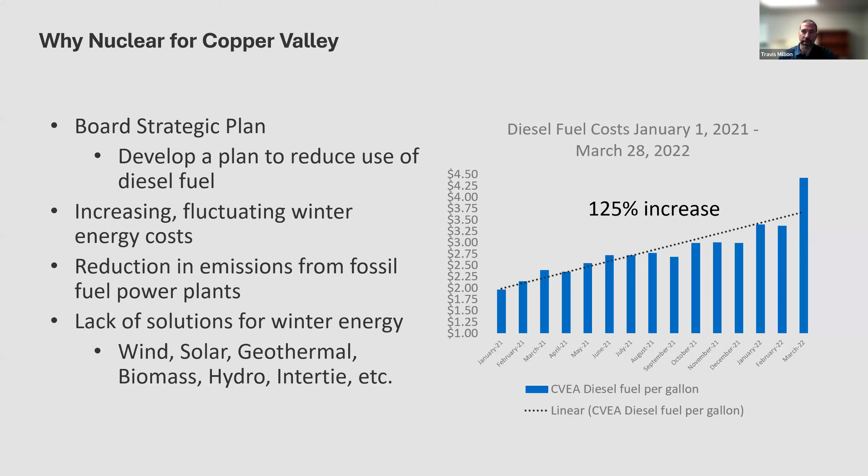This was just another option that CVEA was exploring. Back in early 2020, our board unanimously decided to start pursuing the MMR technology more and find out what we could discover for solutions in our service territory. So at that point is when we started talking to the various manufacturers.

One of the misconceptions we saw throughout this entire process was that people were really confused on really what MMR technology was and wasn't. A lot of people thought anytime you mentioned nuclear, they were thinking of the standard light water reactors used in the current fleet in the United States, which are very large scale facilities. So what I'm showing here is a graphical representation of the landmass needed for a light water reactor versus the landmass needed for an MMR.

Again, we were working with USNC. Their particular project we were looking at was about a 10 megawatt electric unit that took up about 5 acres of land - quite a bit smaller, about the size of 2 football fields. And that's just being represented here in this graphic.

The other part we recognized was that people were really confused within our communities about how big the reactor building would be. The graphic showing the red cylindrical spot in the middle of the light water system is the reactor building. And we had to zoom in on the yellow spot in the middle, which is about the size of a Connex mounted vertically into the ground, to show how big the reactor building is on the MMR. So quite a bit smaller than a traditional reactor.

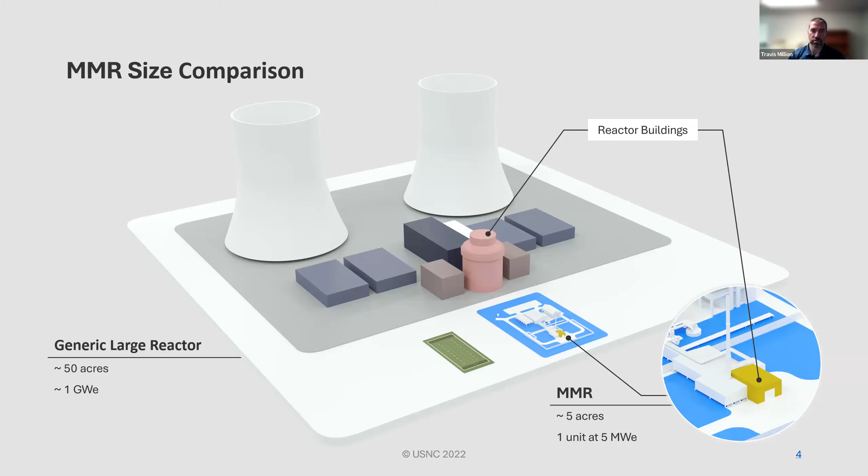This slide's just talking a little bit about the technology, but what I want to point out is this graph in the middle on the right-hand side. It would have 2 reactor buildings giving us 10 megawatts of electric energy and a total of 30 megawatts of thermal.

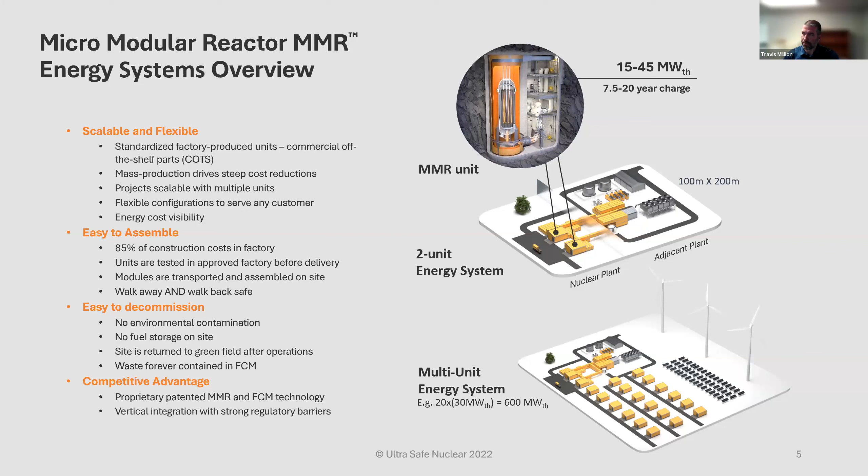So the purpose of our feasibility study, and what we wanted to discover, was whether there was anything that would prevent us from siting a micromodular reactor within the CVEA service territory. We wanted to identify preferred sites and locations and what those characteristics would be, and start looking at what the cost parameters would be in order to make a good decision point going forward. For a cost comparison, we figured going in that there was no way that, especially the first of a kind coming out, would be able to beat our hydro prices, but we were pretty certain we could beat our diesel fuel prices. Obviously we're also looking at the benefits and the concerns and issues of the communities in our area.

And to take it a step further, as we contracted with UltraSafe to do the feasibility study, we wanted to have a third-party independent consultant take a look at this information as well. So we contracted with an Alaska-based company, Electric Power Systems, to spot check the information. They're a company well known throughout the state of Alaska, they do a lot of work in the electric utility industry and have done a lot of work with us. So we just wanted some third-party credibility in addition to the work CVEA and USNC were doing on this project.

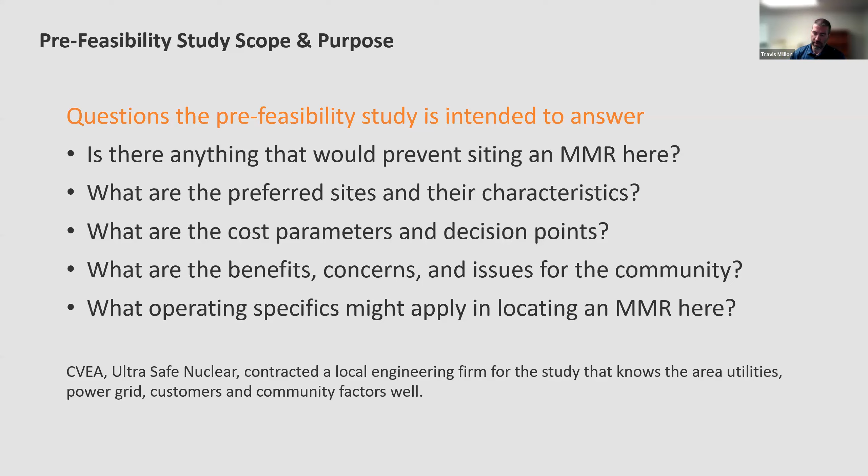So what I'm showing here is just a timeline of the feasibility study we went through. We made an announcement in February of 2022 that we were going to move forward with a feasibility study looking at the MMR technology for the CVEA system.

Prior to that, we actually went and met with our congressional delegation in Washington, D.C. in November of 2021, just to give them a heads up so that if any constituents reached out to them, they weren't blindsided. At the same time, we reached out to the governor's office, and in January we met with our state delegation and discussed this with them as well. Again, we didn't want to blindside any of our legislative folks.

From basically March until the first part of October, the study was being developed. We received the draft copy of the report in October, and our board discussed the results during our October board meeting. We needed a little more additional information to finalize it, including some internal economic analysis, which was completed in December of 2022. We met again with the board in January of 2023 to determine next steps.

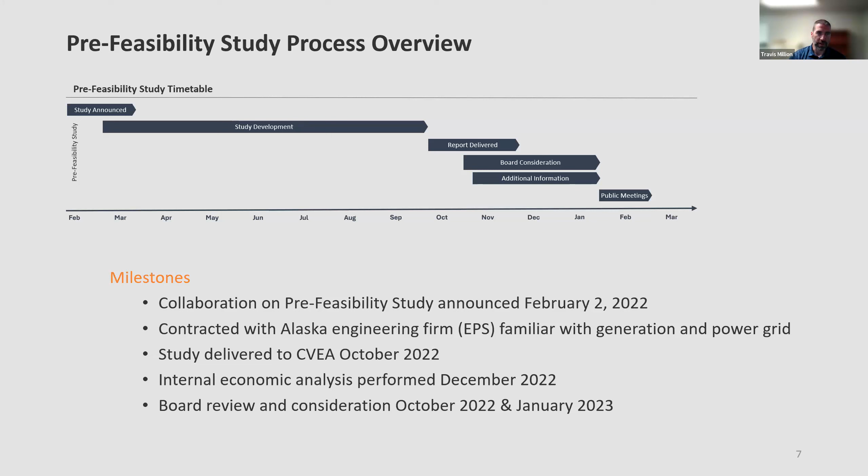A different approach we decided to take with this was to get out in front of it early. Normally, if we were looking at a generation project, we would do the feasibility study, maybe start doing field studies, and once we had results, we'd go public and start talking to our membership about the potential of the project.

But because anytime you mention the word nuclear there's mixed emotions with it, we wanted to get out early and often with our membership. So as soon as we made the public announcement, we started holding public meetings in our service territory. Even though we knew there would be a lot of questions we didn't have answers to, we thought this was a prime opportunity to find out what issues or concerns our members had and figure out ways to address or educate on those things.

During that time, we went around and had public meetings both in Glennallen and Valdez. We met with the Valdez City Council. We had multiple trips back to Washington, D.C. and to Juneau, and just had a lot of stakeholder engagement throughout the entire feasibility study process.

There were a few things that came up, and the thing we continuously heard over and over again, besides the fact that there was some misconception on what the MMR technology was and was not, was safety issues, environmental impact, and waste disposal.

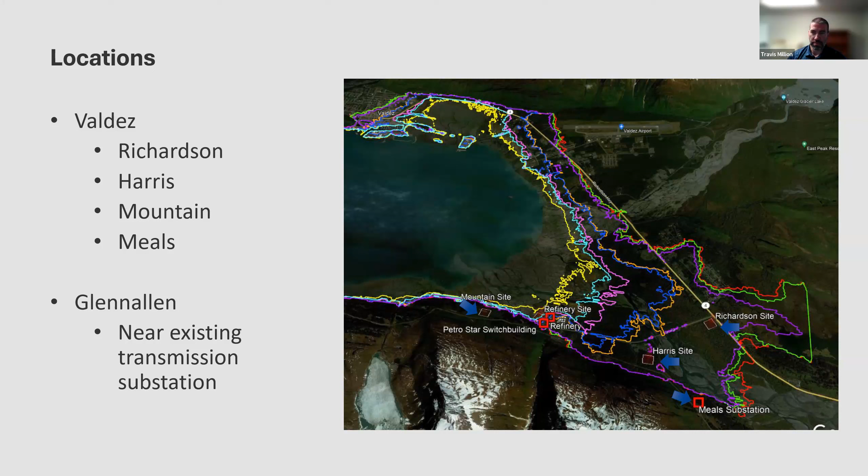As we were looking at this for Copper Valley Electric's situation, essentially what we were evaluating was we knew we would still have our hydro we wouldn't be able to displace. We'd be able to displace some of our diesel, but primarily we wanted to look at what it would take to displace our cogeneration project that's currently our wintertime workhorse.

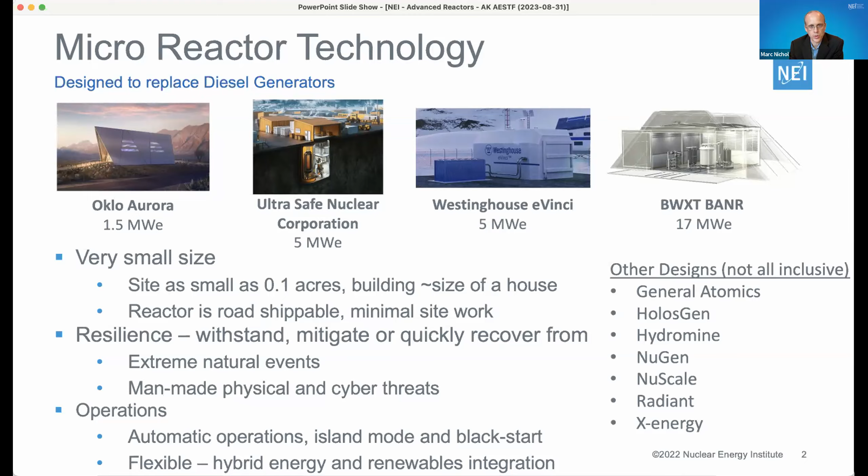The system benefits of advanced reactors are largely the benefits of nuclear energy generally: long-term price stability, because we're a high capital cost, but a very low fuel and operating cost technology.

Readily dispatchable. I talked about the resilience and reliability, so it's 24 hours a day, 7 days a week, 365 days a year. One of the differences with microreactors is that current nuclear energy has to refuel every 18 months or 2 years. Microreactors are being developed so they can go between refuelings 5, 10, 20 years, possibly even longer. So they're much easier to locate at a site without needing to transport much to that site for future maintenance. It's all really self-contained for a very long time.

Talked about integration with renewables. The use of transmission is much more efficient for nuclear energy generally, just because of our energy density. So not only is it the land utilization, but more importantly, the efficient use of transmission as well.

I think by now most everybody knows nuclear energy is zero carbon emissions, but we're also one of the lowest total carbon footprints of any source. I think we're tied for the lowest with wind. And we're also being designed, especially the microreactors, for what's called dry air cooling, so they don't need a local body of water as an ultimate heat sink. And I talked about the black start capabilities.

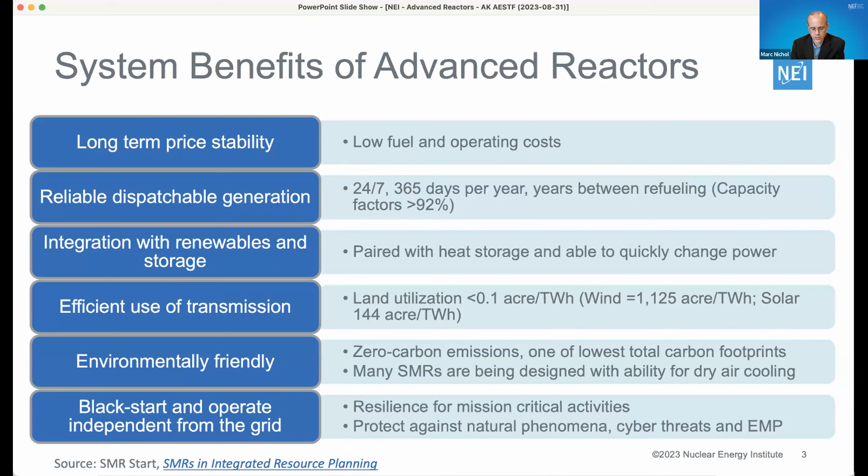What we're hearing is that even those processes that might be a little bit higher than what the output of the microreactor would be, it's very simple and cost effective to be able to boost that with electrical heaters to get to even higher temperatures. So really all of these potential heat uses are all within range of what a nuclear microreactor would be able to produce.

Looking long range at very remote areas, you can start to imagine future scenarios where not only is the microreactor providing that electricity, it can produce district heating. So it can provide heating that's piped throughout the local village to provide heat directly, to decarbonize heat generation for homes and other things.

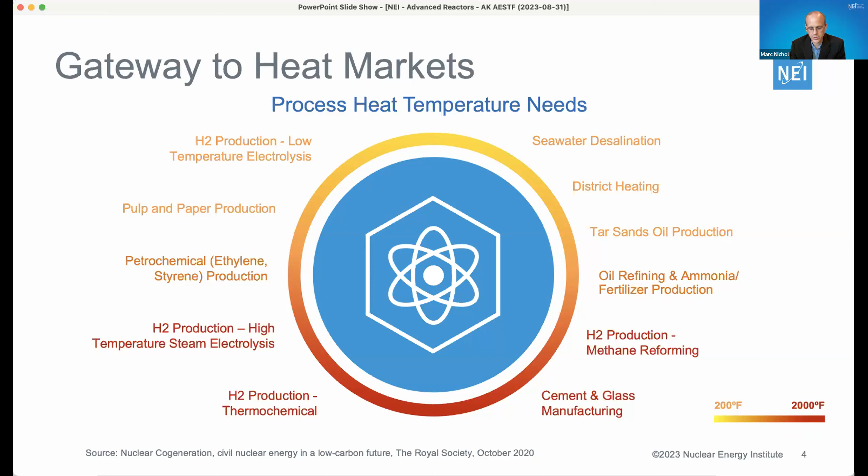It could also be used to produce whether it's hydrogen for hydrogen vehicles or electric vehicles, or ammonia for different things. I know the Department of Defense has talked recently about the promise of technology that would be able to produce jet fuel just by using energy in the air. So there's a lot of opportunities that a microreactor could really be self-contained to decarbonize all energy needs in a particular location.

That brings us to the market opportunities or applications for this, and I'll divide it into stationary and mobile. Looking at the stationary, these would be microreactors that are in place for their entire lifetime, 20 years, 40 years, or longer. And those are remote villages and other things. Now in terms of that lifetime, I talked about the fuel life, which could be 5, 10, 20 years, or even longer.

But the business approaches that people are starting to think about for microreactors is that they would almost be like batteries, where you would bring one in, it would operate for its fuel lifetime. So the fuel might be, let's say, 10 years. And then you would come in and swap it out for a different microreactor that has new fuel in it. And then after that microreactor that you had there first cools off, you could remove it from site, including its used fuel, take it back to a factory and refurbish and refuel it there.

So the used fuel wouldn't stay at the operating location. It would be taken away after a cooling period. And then that reactor vessel can operate for longer. That's why you would refuel it. But that site itself, because it's continuing to get refreshed with a battery every, say, 10 years, it would be licensed for 40 years initially. But what we're finding with today's reactors is that they've been relicensed for 60 years. The NRC is going through a process to relicense them even longer, up to 80 years. And so these are really, really long duration assets.

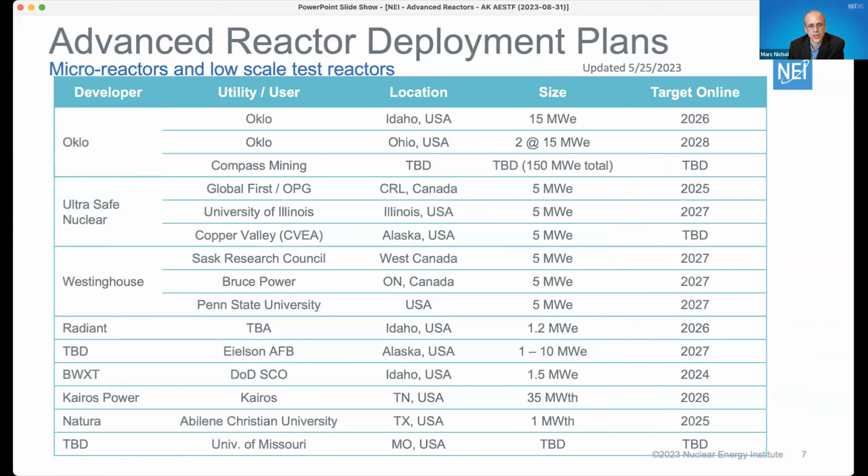This is a list of all those projects. I went through some of them. We can come back to questions on this if you want to know more, but otherwise I won't go through the details now.

When we look at advanced reactor licensing progress, this is an indicator of maturity and commercialization, because everybody has to go through the regulatory process. There are a number of microreactors going through that process. Abilene Christian University is under review now. Some of the others I mentioned are in what we call pre-application, meaning they're interacting with the Nuclear Regulatory Commission and preparing to submit an application to the NRC.

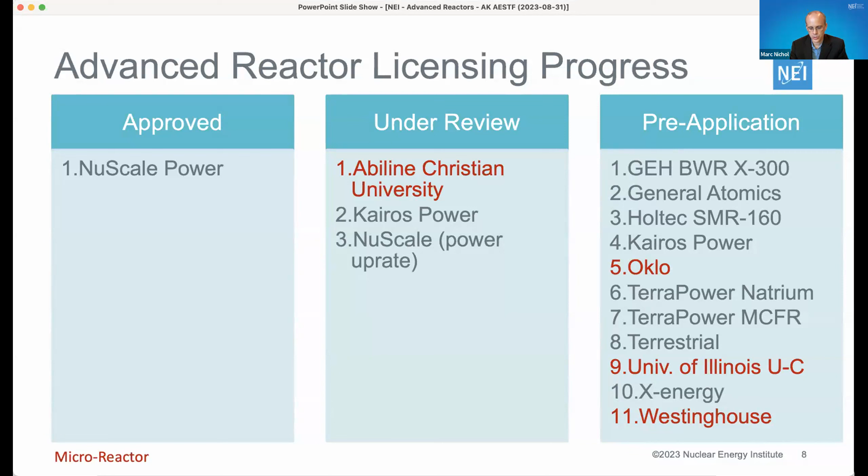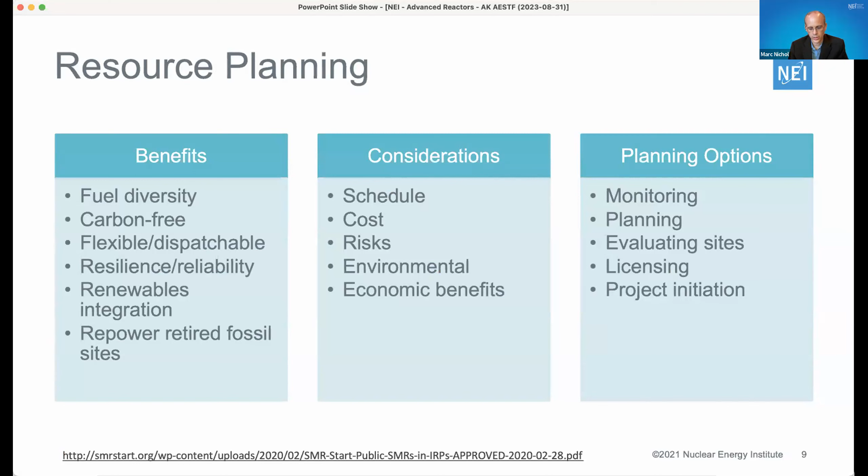In terms of thinking about microreactors, there's a lot of information about how you do resource planning. The one I want to focus on here is cost. I'm going to talk a bit more in depth on cost, but I just wanted to show that there are many considerations you need to go through, and the one I'm about to discuss is just one of them.

When we look at cost, NEI did a paper back in 2019, which I recognize is a few years old now. After I go through the results from that earlier paper, I'll talk about what the current situation in 2023 implies for that.

We did a cost analysis on microreactors and tried to compare them against diesel generators in a number of markets. First, in terms of estimating diesel generator costs, we looked only at the fuel cost. We decided not to take in the depreciation of the capital cost, figuring that's already been paid for and built in. So swapping it out for a microreactor isn't really the thought process, because we're really looking at replacing installed diesel generators, not a question of whether new generation should be diesel or micro. So we did not include capital.

We also did not include O&M. We recognized those costs would increase it, but we wanted to be as conservative as possible in this cost analysis. The fuel prices we used ranged from $2.86 a gallon to $4.89.

For the microreactor cost, we sourced the cost inputs from the microreactor developers. We have a range of cost inputs in that report that's referenced here, everything from the overnight capital cost to the fixed and operations and maintenance cost, fuel cost, and decommissioning, as well as the refueling, which is basically the swapping out of the fuel that I talked about earlier.

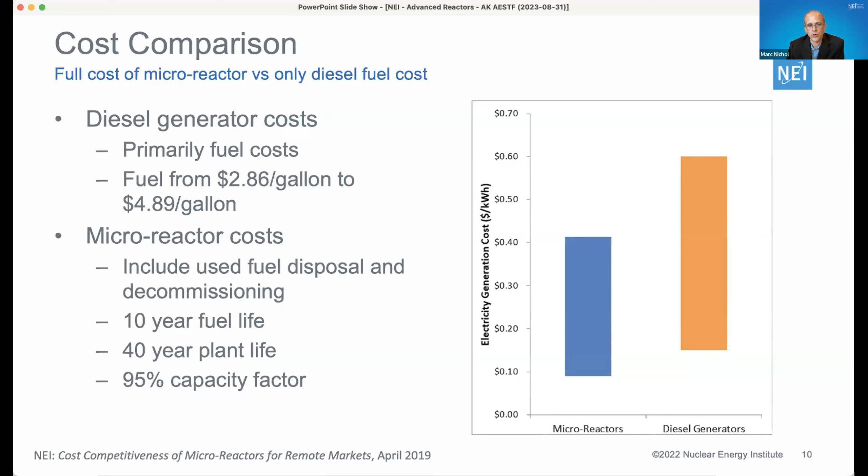You can see here the overall conclusions. I'm going to go into some detail on what's under the hood here, but the overall conclusion is that in most cases a microreactor could be lower cost than the installed diesel generator. So while every decision is project specific, it does show that a microreactor is at least something people should be considering.

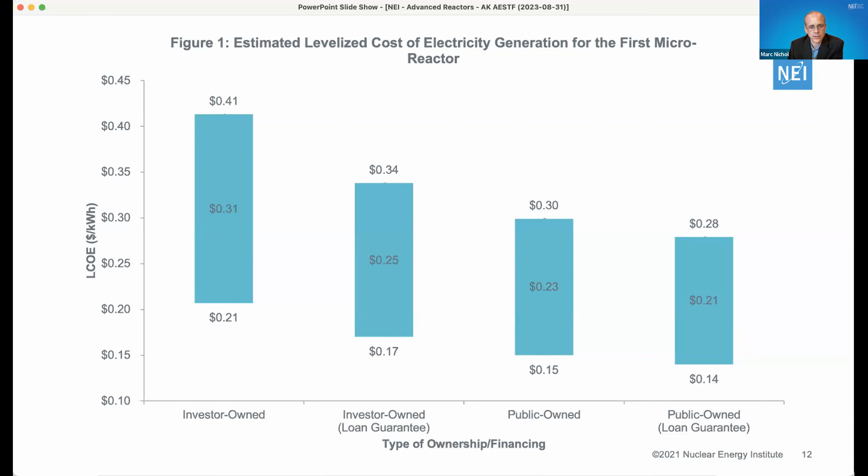We also looked at the sensitivity on how much of a capacity factor the microreactor achieves. They're able to achieve a 95% or above capacity factor because they are that reliable, resilient generation. But if you were going to integrate them with renewables and flex them up and down in power, and you would just be producing electricity, not switching that electricity to heat or hydrogen, then you're not operating at full power all the time. So you get lower capacity factors, which, if you're a high capital cost asset, is a problem, because you want to operate it as much as possible, since your operating and fuel costs are very low.

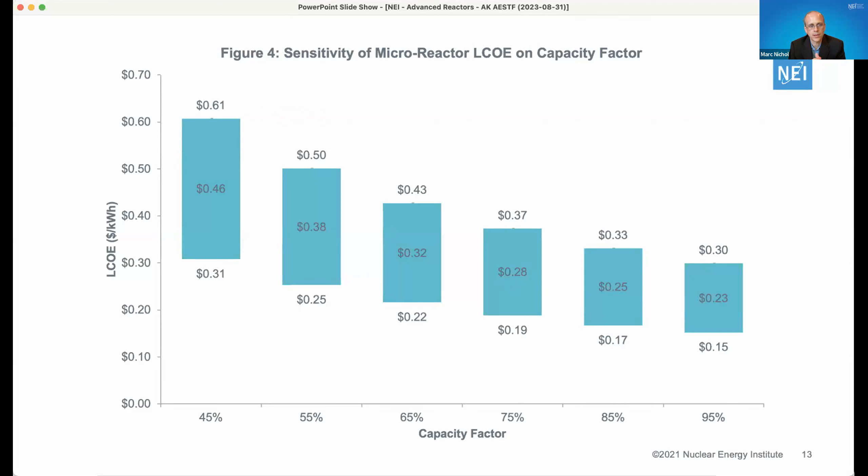Finally, looking at the financing of microreactors—one of the earlier questions was, well, what's the total capital cost? So we took a 5 megawatt plant as an example, and using the numbers in the report, you get to between $50 and $100 million for the capital cost. That's the upfront capital cost.

Recognizing that could be really significantly high for some smaller communities that may want this microreactor, and a bit difficult to come up with all that capital up front, although not impossible, there are financing options available. We looked at what are the different options for business models. The conventional business model would be that the local utility finances all that capital cost, typically by debt. As I mentioned, you have lower rates, you can amortize it—there's certain advantages to that.

But there are new business models that the industry, and especially the microreactor developers, are working on. That would be where the developer would own and operate the plant, or they might find a third party that does it, but usually it's a developer. Then they would sell the power to the local utility through a power purchase agreement. The local utility then would not be financing the capital costs—they just pay for the power. So under this model, it doesn't matter if the capital cost is 50 to 100 million, because the utility is only paying on an annual basis, or per-service basis, for the power.

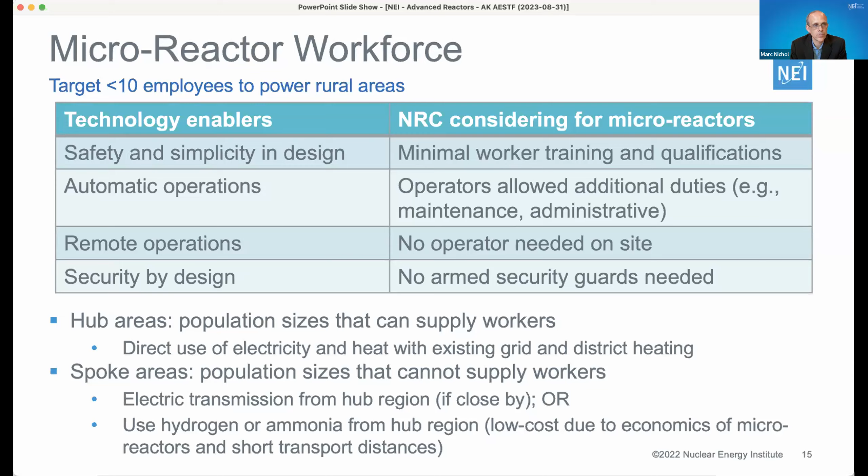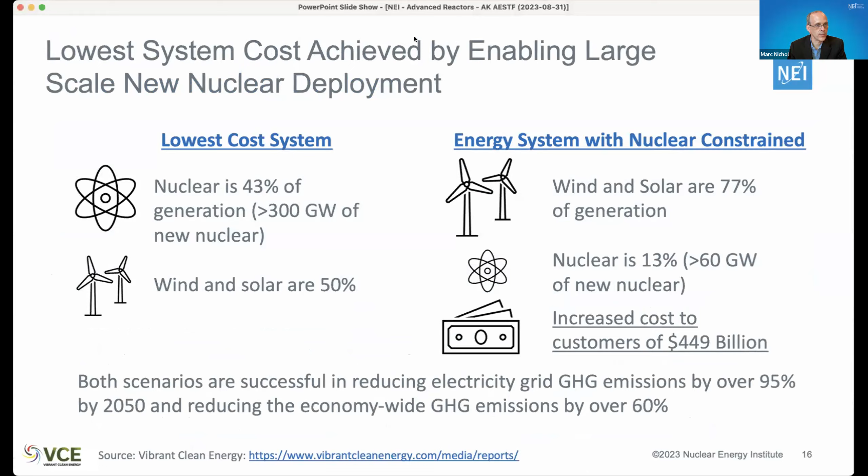Yeah, let me go back to figure 4. Would it be in the report, or was it in my presentation? Oh, I see, okay, it was the first figure, this one. Yes, it includes cost of capital. Excellent, thank you.

So unless there are other questions from our task force members, I'll give our Q&A a chance to catch up if there are any remaining questions, but I do have one question for you, Mark.

What market factors do you anticipate will influence the cost of microreactors into the future? I understand there are some concerns about the supply chain for fuel, the availability going forward for helium in gas-cooled reactors. Do you have any sense of how that will impact cost competitiveness going forward? Yeah, that's a great question, and actually you touched on the thing that I forgot to mention.

I promised that these were 2019 numbers, and I promised to say, well, what does it mean in 2023? So a couple of things. One is that when we put these numbers together, the microreactor cost, in many ways, we tried to be conservative. So I think if we reran these numbers today, those costs would actually trend closer to the lower range than the higher range. I think that was a good thing.

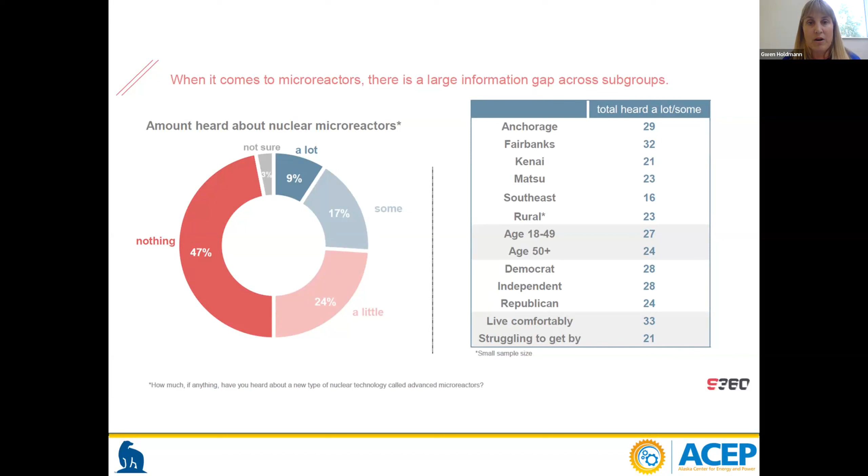When it comes to whether folks have actually heard about microreactors or advanced reactors, about three-quarters of people had heard nothing or very little about them. That was a little bit surprising. Only 25% had heard some or a lot about microreactors, and that was fairly consistent across the state. Fairbanks was a few points higher, but not very much. So that just shows that there's still a big part of the Alaskan public that isn't tracking or isn't aware of this technology, especially how it differentiates from more legacy or conventional nuclear energy.

One of the findings was that without additional information, when we simply asked, are you supportive of nuclear energy as an option for Alaska, the support was pretty low, especially compared to other energy technologies. It was about 48% total, with 27% strongly supporting it. Then we went ahead and gave them a paragraph, I'll pull this up here, that we tried to make pretty neutral, but gave a little bit of additional information on what a nuclear microreactor is, how we're defining it, how large it is, in a context people can understand.

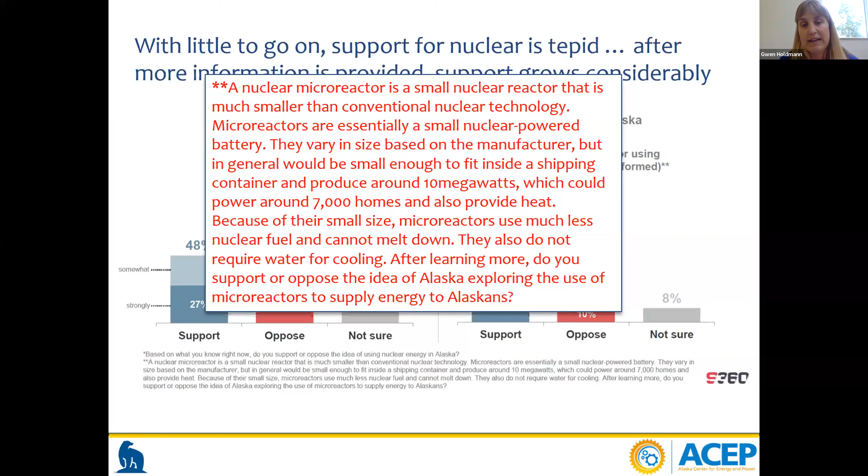And then a few other factors, like the fact that they don't require water for cooling and things like that. And then we asked them again what their perception was, and the change to support was quite high, it was 26%. So what that would indicate is that there's still a lot of people that just don't know enough about the technology to really have a truly informed position on it.

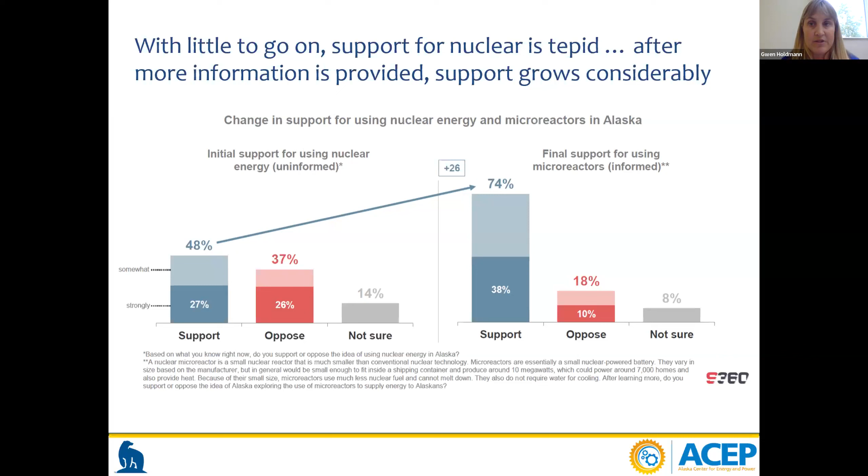You can also see, though, there's about 10% that strongly oppose nuclear energy, including these microreactors. I don't have this slide here, but it actually does show that this is really, really consistent across all political affiliations, whether Republican, Democrat, or unaffiliated. It's pretty similar. There's not a big difference in terms of either support or concerns about nuclear.

So I think that this question could have been presented a little bit better, but we did ask voters what concerns they had when it comes to nuclear energy. And I think the flaw that we had here is that we didn't really ask them to either rank it or pick their top three. And so there's a lot of people who just basically were like, all of the above.

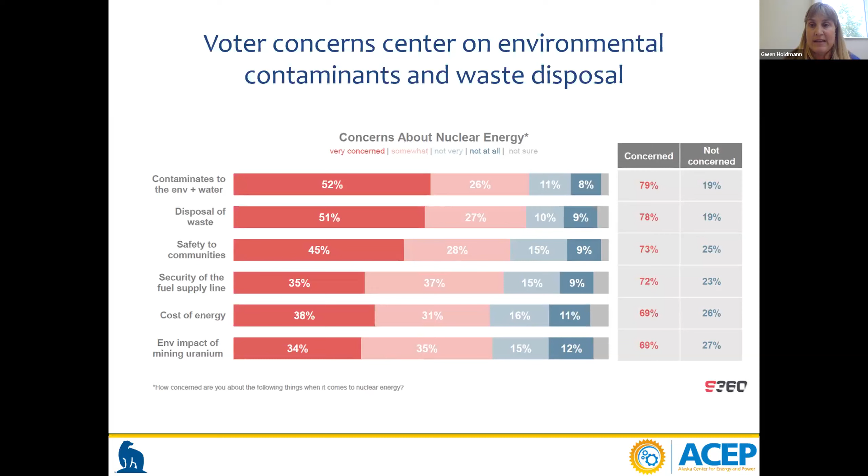And so when you looked at - sorry about that, all right. I'm going to come back to that in a second.

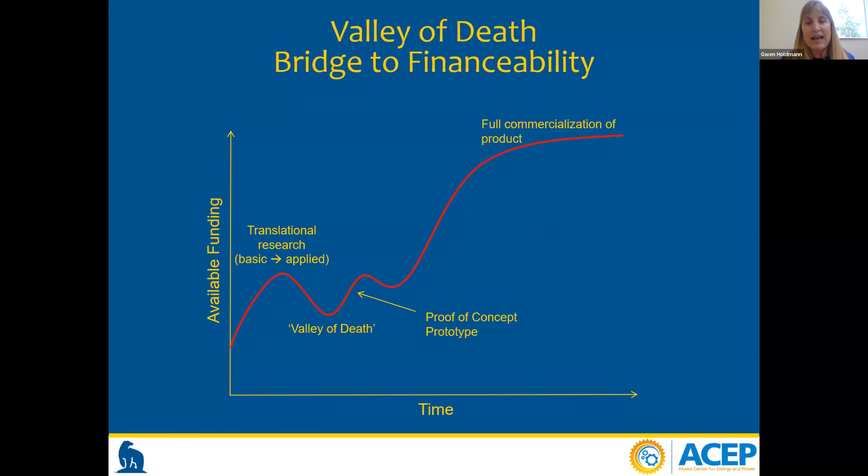Right now this is where I feel like microreactor technologies are sort of wandering around in different places in this space. So the question becomes for Alaska: how do we want to approach this technology? Is this something where we want to say, hey, we're interested in being an early adopter?

And what does that mean, right? If we're an early adopter and taking a proactive strategy around nuclear energy adoption, how can we be working with Department of Defense? How can we be working with Department of Energy and other federal stakeholders to say, we're interested in helping shape and co-develop a technology that we think has value for Alaska, but we don't want to take all of the risk, and we certainly don't want to take all of the financial risk associated with these early adopters.

A lot of times the way I see it is that everybody's interested in serial number 10 for these reactor designs. People are less interested in serial number 1 through 5 or 1 through 10. And that's really where I think the federal government can step in, Department of Defense and others, to look at what's the strategy to get to this nth unit deployment and the nth cost that Mark was talking about. The first unit is going to be more expensive, but if we can look at a strategy for deploying a number of them, how do we get to that lower cost that I think the industry needs to drive to in order to be viable?

So that's one thing Alaska can be thinking about. One thing I caution against is if we just take a wait and see attitude, just see how these work out, I worry that as a late adopter we won't be in a very good position to get unit number 10, or unit 10 through 50. Once these are proven commercial, once the economics are well understood, and if those look promising, there's going to be a very long line of potential customers for these units and products.

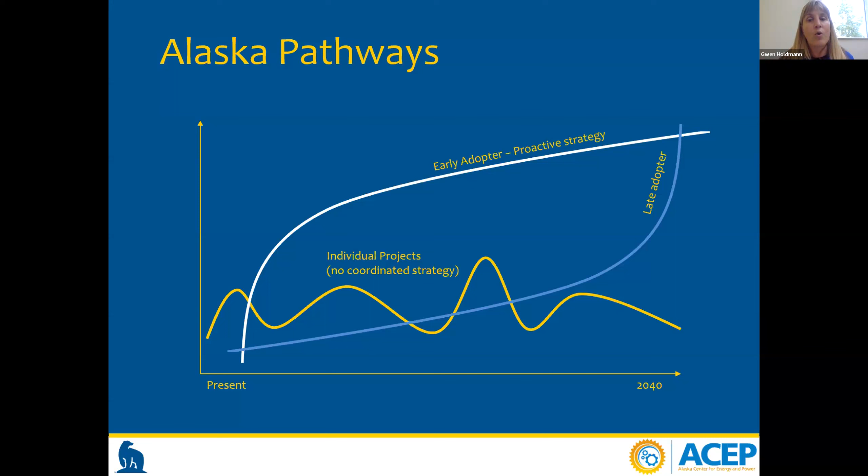One of the things I think, because this is really geared toward the task force, is that question around: is there a more proactive path we want to consider for Alaska? Because we do think this could potentially be an important part of our overall energy portfolio in the future. Or do we want to take that kind of wait and see attitude?

So I'll wrap up here with issues or considerations. One thing the poll really showed is that the public really isn't that well informed about microreactors, and that's a little bit concerning to me. We've made a lot of effort to reach out to the general public, and it's clear we're still only really able to reach a pretty small subset of the Alaska population, so that's something to keep in mind. Utilities—Travis and CVEA were a real exception to this—but most of them are taking a pretty passive approach.

We are interested in microreactors, in modular reactors, in nuclear reactors, if they're proven to be commercial and if they make economic sense. That's a pretty prudent and pragmatic approach from the perspective of the utility industry, and that's mostly what I feel like we largely are in terms of thinking about whether to make active decisions about pursuing this, or just sitting back and saying when it becomes commercially available, we're interested.

Another thing too, if we're looking at nuclear energy as a potential option, and this extends a bit to other advanced technologies too, sometimes I think traditional approaches to procurement may not really be optimal for some of these early project deployments.

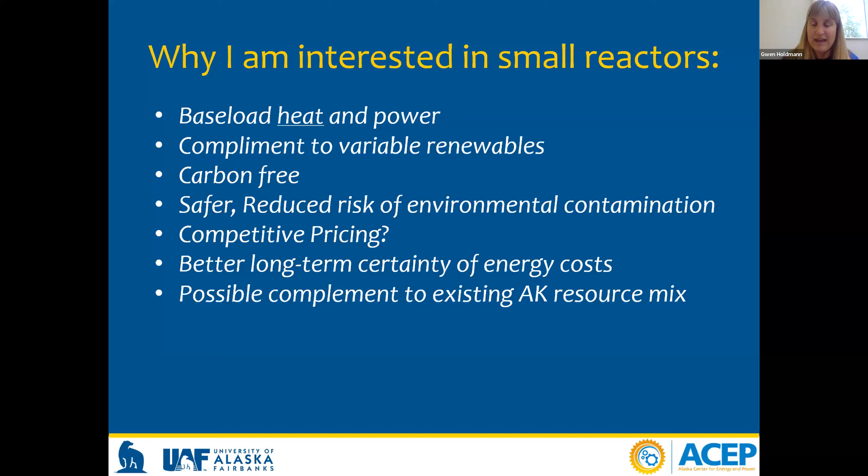I think too that this long-term certainty of energy cost is another factor, because there's a fairly long time between refueling. That gives us more certainty and some insulation against short-term price spikes in terms of fuel costs. And then I think it's a good complement to other existing resources in Alaska's mix, and to the market that we're in. So I think that's all I've got. I'll end it there.